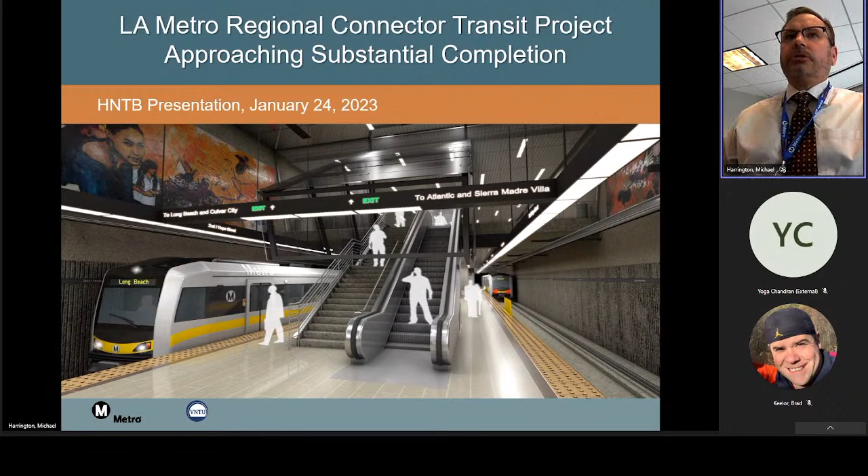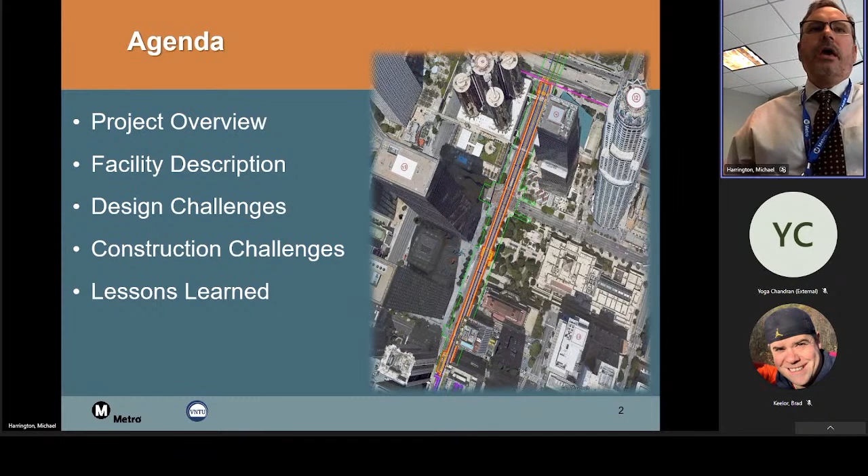The title of my presentation today is LA Metro Regional Connector Transit Project Approaching Substantial Completion. The agenda topics I'm going to cover: I'll provide a brief project overview, get into some facility details and descriptions, then talk about design and construction challenges we've experienced over the last few years, and wrap up with a brief discussion on lessons learned that might be applicable to some of your projects.

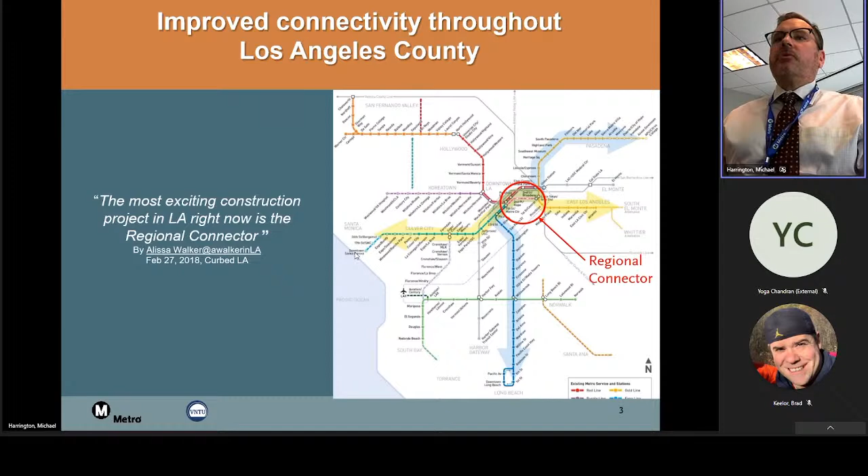Now if you flip over to the east side of downtown, we have our Gold Line, which connects Azusa, Pasadena, LA Union Station, and then turns easterly out to East LA. Right now these light rail systems are disconnected. What we're trying to do with Regional Connector is link all of those up so we can have one-seat rides from south to north through the county, as well as west to east. That's going to eliminate potentially up to 20 minutes in some of our commuters' travel times from all the transfers they need to take today.

Some other highlights or statistics about the project: it's not very long, it's 1.9 miles long. It comes up Flower Street, makes a sweeping turn easterly underneath 2nd Street, and connects into the existing Gold Line in the Little Tokyo area of downtown. We are building 3 new underground stations to better serve downtown. We anticipated, pre-COVID, 90,000 daily trips, and we're planning to run trains eventually at 2.5-minute headways through the corridor.

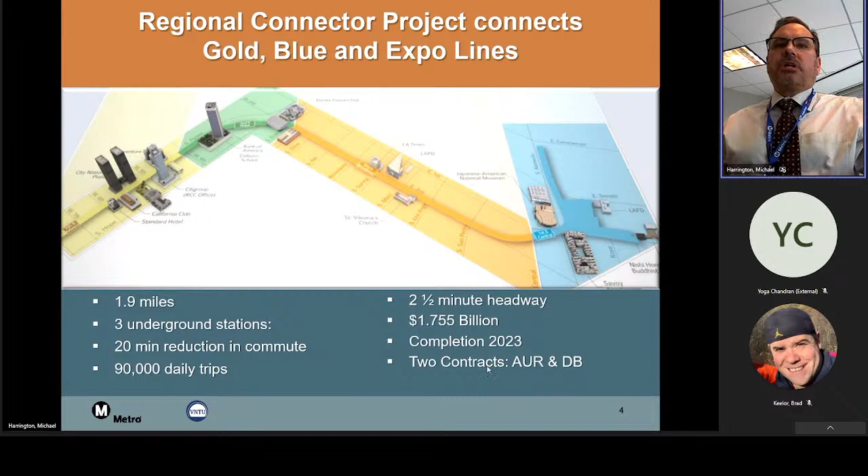Our full funding grant agreement is $1.755 billion, but if you add in the soft costs and local matches associated with this project, we're closer to $2 billion. We're anticipating a completion in 2023, hopefully in a few months here. We are delivering this project under 2 contracts: one was an advanced utility relocation contract, but most of it's being delivered through a design-build contract through a joint venture of Skanska Construction and Traylor Brothers.

Now a little bit more about the facilities we're building. This slide's a little busy, but what I wanted to show here is an exaggerated soil profile of downtown Los Angeles. If you can see here to the right, this is the Little Tokyo area where our project starts.

It goes underneath 2nd Street. We have our new historic Broadway station, I'll get into the details on that in a moment. For those familiar with downtown Los Angeles, we have an area called Bunker Hill, where our arts district is, Disney Concert Hall, and a few new museums that have opened up, a big tourist area. We're building a new station to serve this area called the Grand Avenue Arts Bunker Hill Station, and then we transition underneath Flower Street, a major artery through downtown Los Angeles.

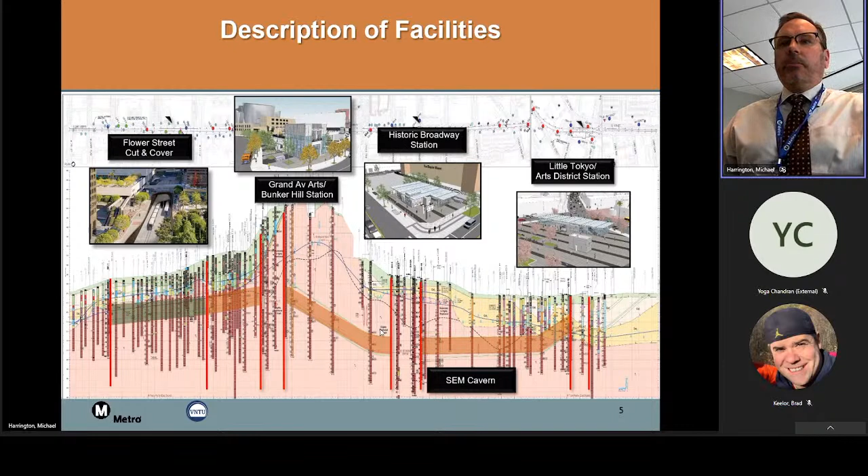And tie into our existing 7th and Metro station. Now, a little bit about the soil profile for the geotechnical engineers on the call. I wanted to zoom in here.

For this particular project, we did generate a geotechnical baseline report. This was part of the bid documents included in the design build solicitation. But if you zoom into some of the profiles, it gives you a flavor of what we were dealing with from a tunneling standpoint. The orange here represents our tunnel profile.

In our project, we primarily were tunneling through a layer called the Fernando Formation. It's predominantly a massive siltstone, or soft rock. It was actually ideal for tunneling, a very soft rock, easy to tunnel through, yet very stable. You could cut into it vertically and not have to shore it.

Above that, though, we did have alluviums. We had coarse grained sediments, sand with some gravelly sands, variable amounts of cobbles and boulders. That was atop this Fernando Formation. And as you approach the LA River Basin, that layer got a little bit deeper and more pronounced.

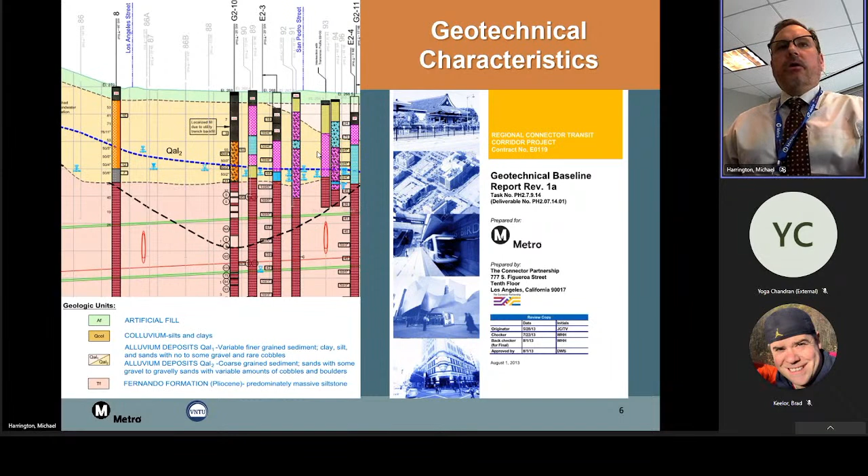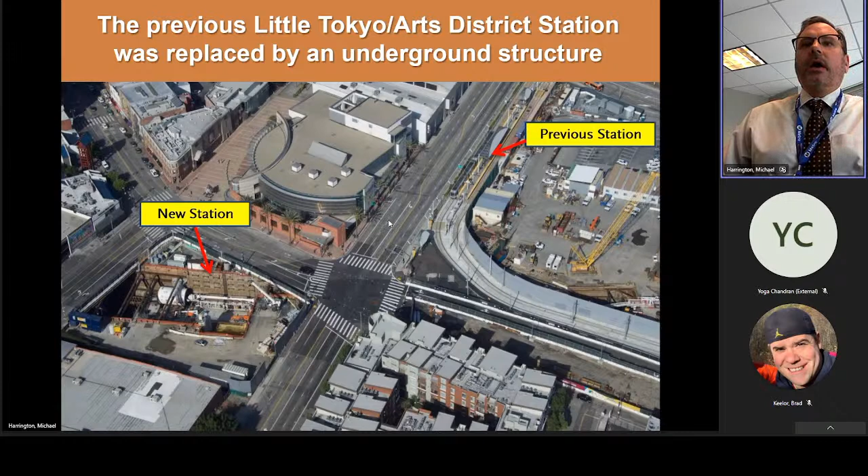In fact, when this photograph was taken in 2016, if you look closely within our supportive excavation system, we actually used this as the launching point for our tunnel boring machine. You can see the cutter head and the shield there real closely, and then our trailing gear went actually underneath the temporary deck that we had underneath Alameda Street and First Street.

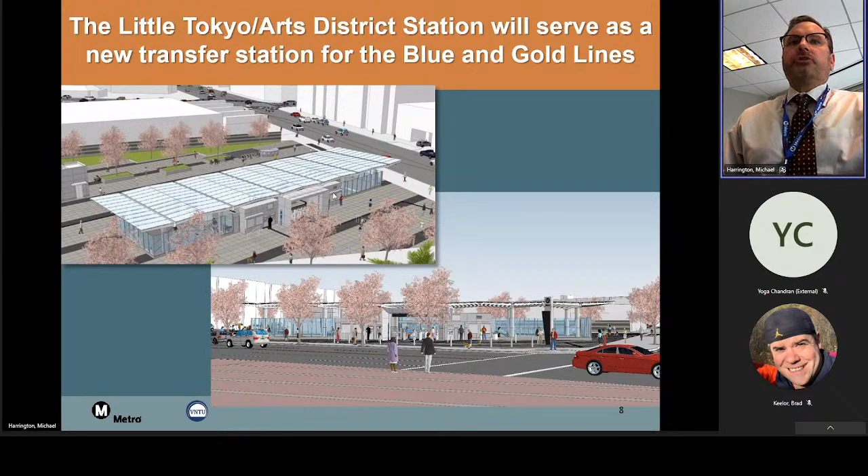This is a rendering of what the finished station will look like. It's pretty much a cookie cutter station for all of Metro's newer stations. We're trying to streamline the design, make roofs and lighting systems standard across all of our stations to reduce costs, especially maintenance costs and spare parts costs.

When we were building this particular station in Little Tokyo, these are some representative samples of our shoring systems that we used. I think we pretty much used just about every tool in the book on this project.

For example, in the upper left-hand corner, we used a soldier pile and lagging system. In this particular area, we additionally shored the system with several rows of post-tension tieback anchors. In this lower photo to the left, you can see we've used some pipe struts. Because we had to support roadway decks in some locations, we used pin piles. This is just another photo of the various types of shoring systems you can see in this area.

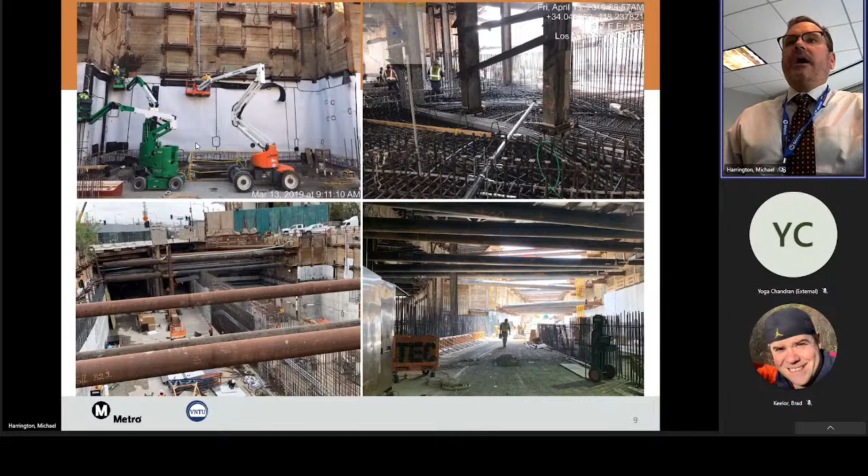I was also going to add real quickly, for our waterproofing membrane systems, we are using an HDPE high density polyethylene waterproofing membrane seam. It has welded seams, shown in the black lines here. We also have a supplemental system called the Fuko hose system, a remedial grouting system that allows us to repair leaks that show up after we've completed construction.

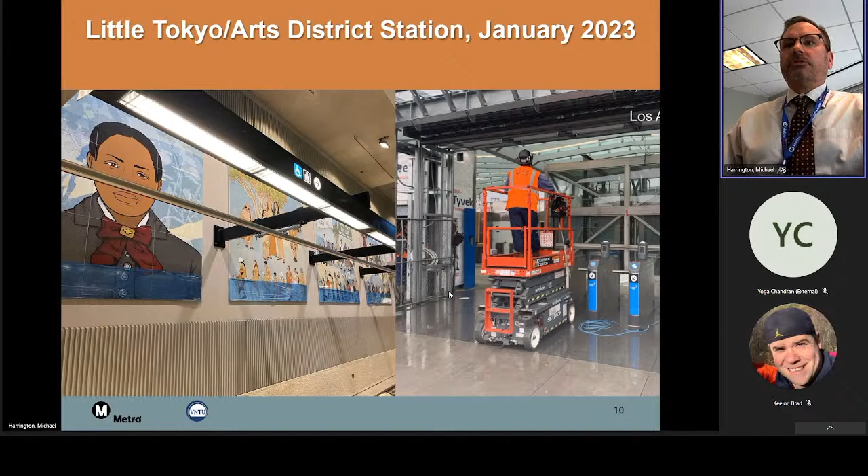And this is what that station looks like today. This is that wall, the completed wall. The shoring system is right behind this artwork in this cast in place wall. This is what it looks like up at the plaza level of our stations. This is another view of the station. Right now we're in the phase of the project where we're just wrapping up mainly some architectural finish work, and then doing some final station cleanup, getting ready for revenue service.

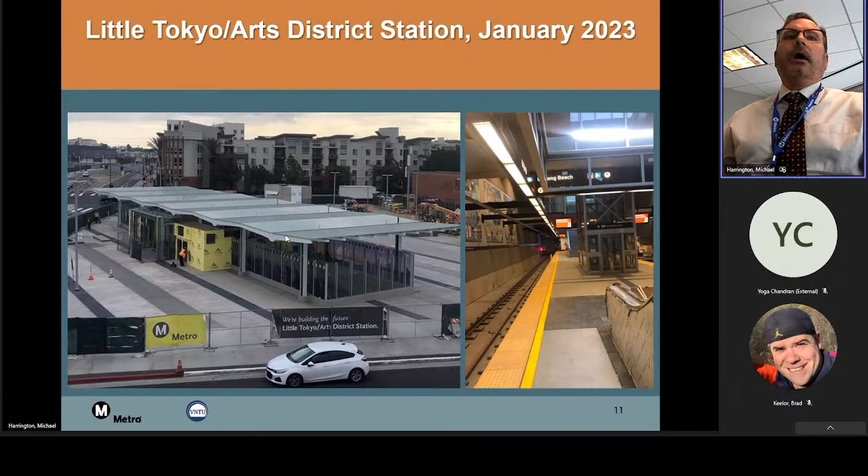In fact, our operations group is running trains right now, doing what they call pre-revenue testing, again trying to support an opening here in a few months.

Moving over to our historic Broadway station, a local landmark in this vicinity is the old LA Times headquarters complex. They actually took up a whole block of downtown Los Angeles. This is a historic mid-rise structure, and then around that were some 1960s and 70s era additions, including a large parking garage.

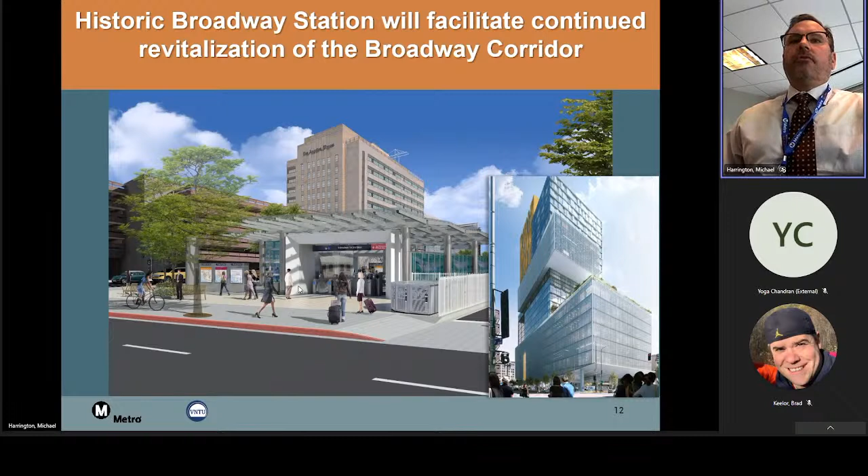So we did enter, Metro as an agency, into a public-private partnership development agreement with this particular developer. Metro got a very steep discount on our land acquisition costs or easement acquisitions for this area. In return, we did design the structure to serve as the foundation for this mid and high rise structure, and the private developer did contribute some construction funds for this particular station.

Now, some other unique things about this station, it was very constrained from an access standpoint. In the background here, this is the historic part of the LA Times building, and this is the older parking garage. But at this particular location, our station was about 70 feet deep. We had to keep 2nd Street open to traffic. There was just too much traffic and would have been too impactful to downtown to close for multiple years of construction here, so we did have to keep it open.

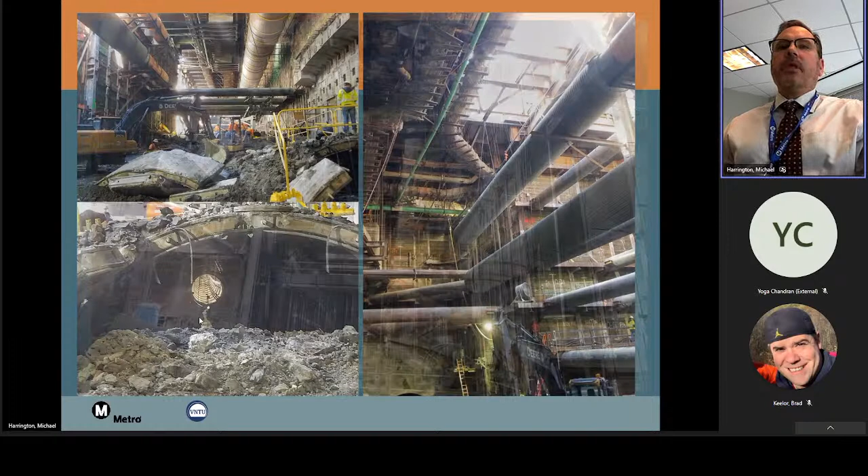The other thing I was going to add is because it took so long to hang the utilities, and the excavation took so long to get down, to additionally save overall construction time, we allowed the tunnel boring machine to actually go underneath the excavation site. And as we excavated or exposed down after the tunnel liners were put into place, we had some throwaway tunnel liners that we just demolished, and that allowed us to get down to the invert of the station. This is what it looked like when we actually reached invert.

Again, soldier piles and lagging, post-tension tieback anchors, struts, you name it, we used it.

The other thing I want to point out, and this was a little hairy for us, is if you can see my cursor here, that is actually the basement of the LA Times headquarters, that 10-story structure that you saw in the photo I showed you earlier. We actually had to underpin it. The foundation came out into the public right-of-way, and we had to design an underpinning system. That took us about a year to design and get approved by the city and the various stakeholders, but it was very successful. And what you're looking at here in this photo is the cast in place guideway structure.

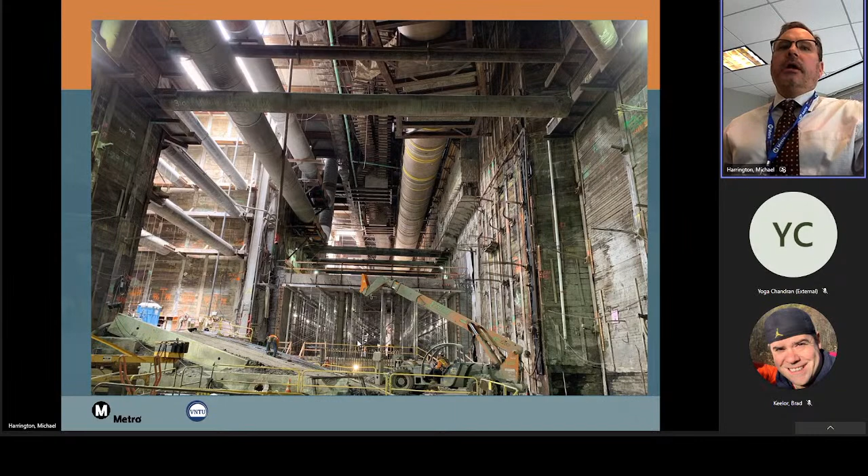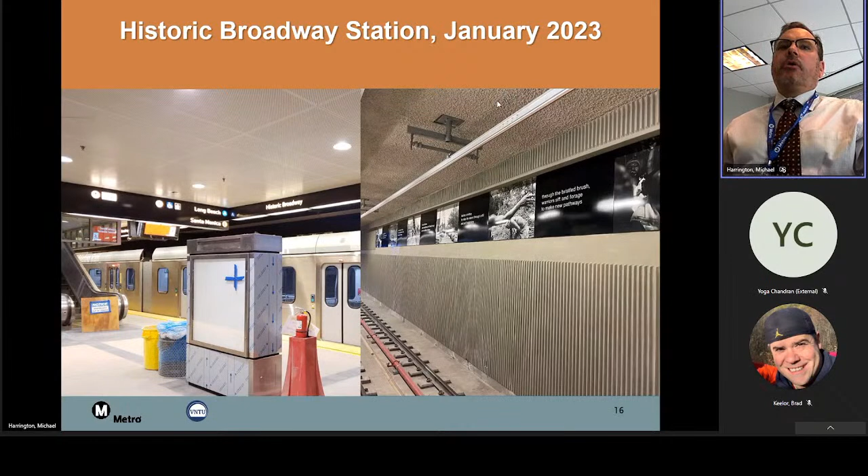This is where our tracks go, where our platforms go, and this is what that area looks like today. This is our platform area, and these are some of the finished walls that were in the previous photo. The LA Times headquarters building foundation entered into that area. These are some more photos showing what it looks like in January, really finishing out the architectural work and cleaning up at the platform levels of the station.

Now, our third new station is going to be the deepest station on the entire metro system. It's 100 feet deep. The unique thing about this station is not only does it have a pedestrian bridge that's 2 stories above finished grade, but passengers will actually get down into our station via 6 high-capacity, high-speed elevators. Because of the depth of the station, it was determined to be impractical to use a series of stairways and escalators to get down there, so we were using elevators.

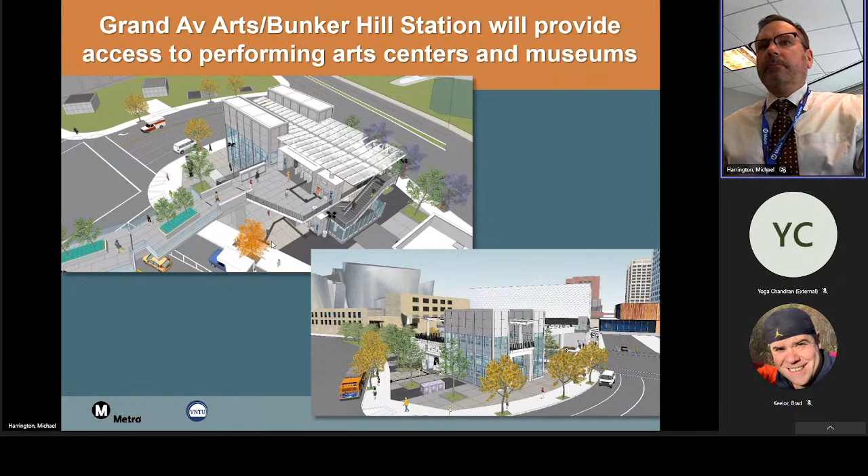We modeled this station after one that was built by Sound Transit up in Seattle, as well as one that's existed for years out in Washington, D.C. on the D.C. Metro system.

This is what it looked like when we were excavating for that station, because it was so deep. To put it in perspective, that little orange dot is a construction worker. We had 5 rows of struts, 5 layers of struts, needed for this particular station.

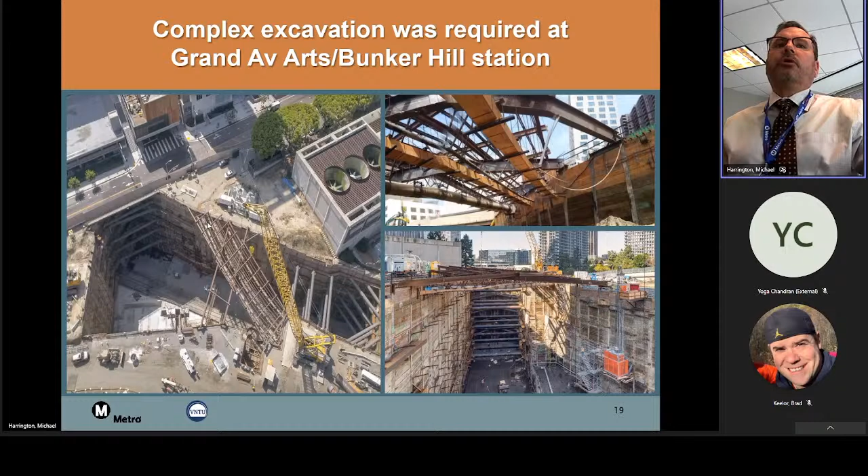We also had many dozens of post-tension tieback anchors, and we had to construct a utility bridge. Our new station actually crossed underneath Second Place in downtown Los Angeles. We were able to close this stretch of roadway, but we had to maintain the utility, so we had to build a utility bridge through there.

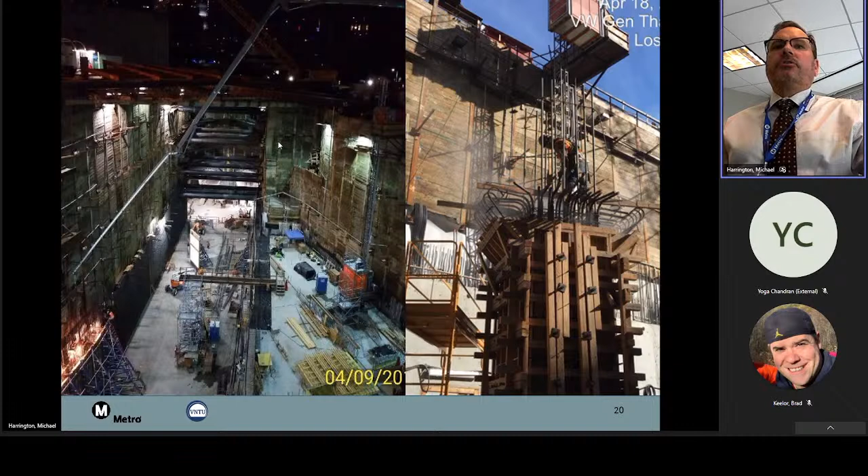These next photos show how the station was constructed as we were coming back up. As we built the invert, continued building various floors, and the concrete cured, we were able to remove the pipe struts and cut off the tieback anchors as we moved up, eventually backfilling the site. These are more progress photos showing the permanent structure being built back up to grade.

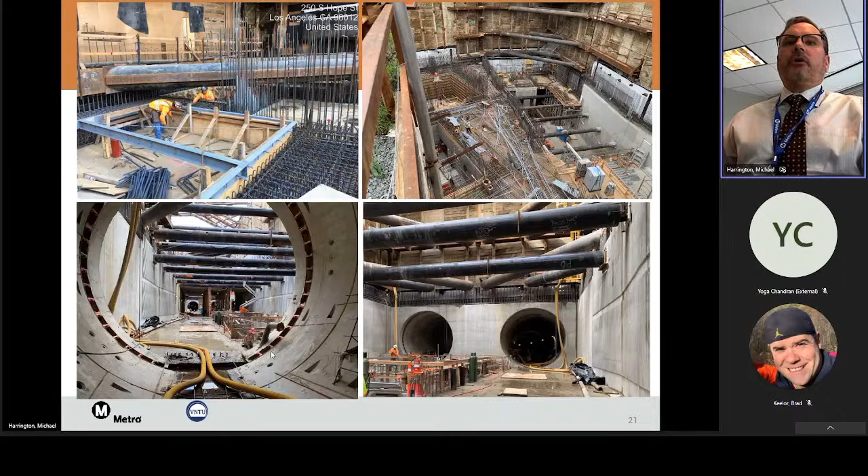In the lower left photo, we also had to construct a seismic joint. We are in Los Angeles, in a seismic zone, so we had to build a seismic joint that allowed for differential settlement and movement between the station and the bored tunnel segments. I'll get into the bored tunnels in a second.

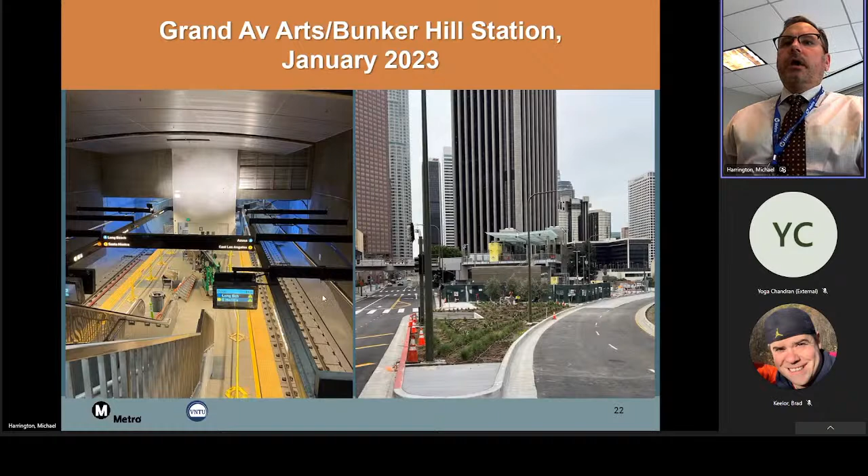But anyway, this is what the station looks like today. This is the interior, the platforms, and up at the street level, the landscaping is now in, along with some other features of this station.

Again, like the other stations, we're primarily focused right now on architectural finishes and an elevator lobby, because this will be our primary means of access for customers and transit users. We did try to make this an enjoyable space. We have glass curtain walls to support our glass elevators, reducing that so people didn't have a claustrophobic feel entering the station.

We also have this six-story piece of artwork, a $1 million piece of artwork. It's all small mosaic tiles that go up along the wall of our open elevator entrance shaft.

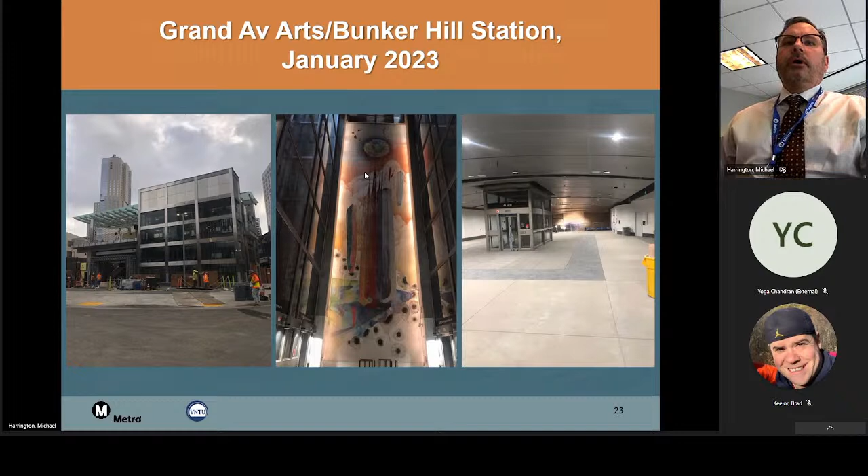Now moving into Flower Street, some challenges we had there: this is right through the heart of the financial district of downtown Los Angeles, with a lot of high-rise buildings. When these high-rises were built, the shoring systems, the tieback anchors, were left in the public right-of-way.

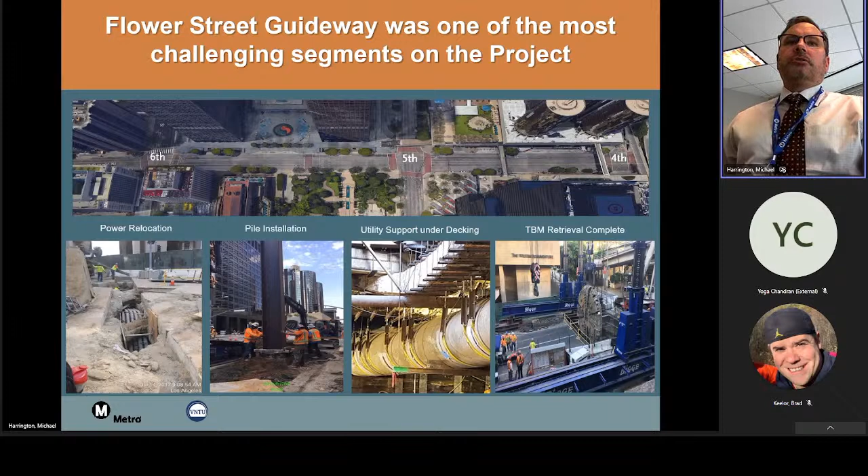We did not want to bring the tunnel boring machine through this area. We felt it was too risky, because if we hit those tiebacks we didn't want to risk damaging the machine and having to do an emergency excavation. I think most people on the call are probably familiar with Big Bertha up in Seattle. We did not want to repeat that down here. So we made a strategic decision at Metro to use cut and cover construction rather than bringing the tunnel boring machines through this area.

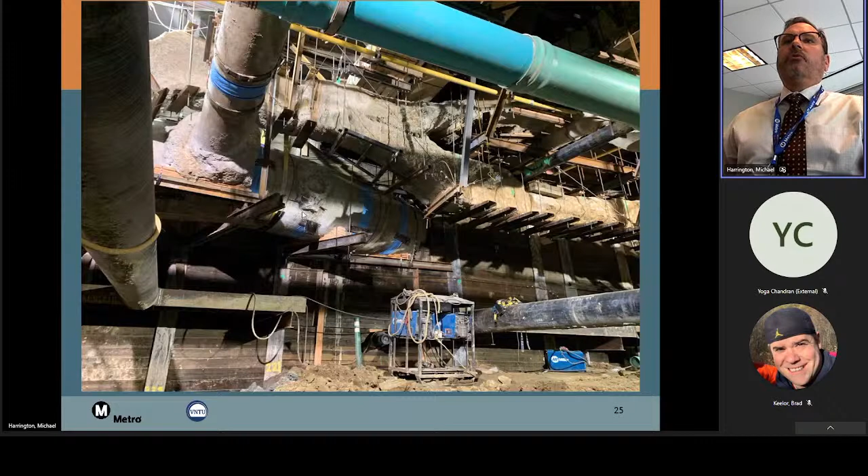These are just some examples of the shoring system that was used, with a lot of hanging utilities. This is when the invert was being placed and our waterproofing membranes were being installed.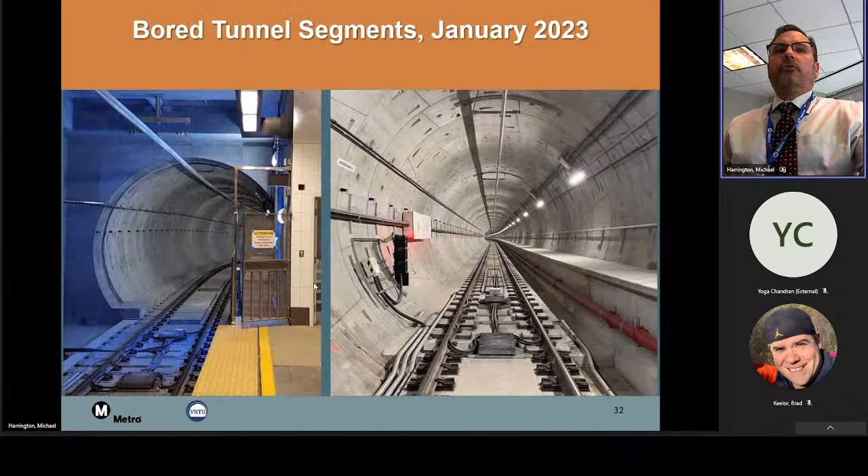Some supplemental measures that we installed—we were very, very concerned about settlement during not only the station excavation but the tunnel boring work. In the Japanese Village area especially, we were tunneling at a relatively shallow profile. So we used compensation grouting pipes, drilling an array horizontally underneath all of Japanese Village Plaza. In case we did have settlement, we could use those to remediate or push up the ground. Metro spent a lot of money on it and never had to use it, but again, it was better safe than sorry.

The other thing we did was monitor very closely ground movement in this area. For example, we used an SAA, or shape accelerometer array. In fact, it was so precise you can actually see some of the technology that's been developed over the last few decades—it's just quite amazing. This is a representative sample showing how this is real time.

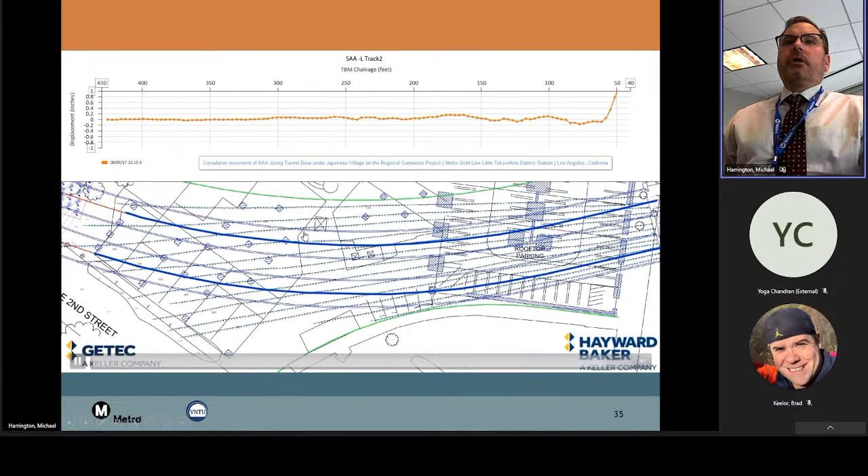It's sped up, but this is real-time measurement of when the tunnel boring machine was going underneath Japanese Village. You can actually see the pressure wave in front of the machine measuring point. In this displacement, we had about 0.2 inches of uplift, but it came right back down when the tunnel boring machine passed. Anyway, it was really good news for Metro—we got through that area without any damage, without any noticeable settlement at all at the end of the day.

Finally, I want to touch on what I would consider the most challenging part of our project. We had to build an SEM cavern, or sequential excavation method cavern, to support a track crossover needed for our operations. For those who don't know, this is a technology developed by the Europeans a couple decades ago. The reason we needed it is where we needed to put this crossover, connecting the two bored tunnels, was directly underneath the corner of the LA Police Department's new headquarters building.

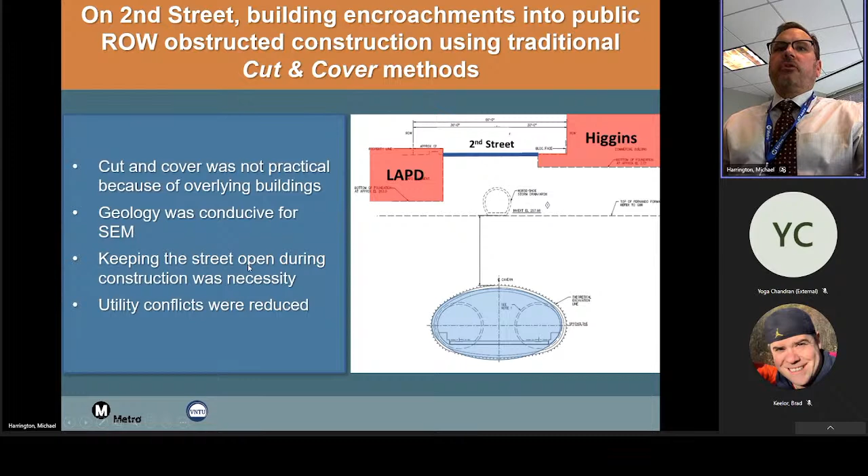It was also underneath the corner of a historic building, so we couldn't do an open cut in this area. So what we did is use the sequential excavation method. It was 290 feet long, 58 feet wide, 36 feet high. What it is, is a series of 5-foot excavations longitudinally into the ground.

Then you temporarily support your excavation with basically a shotcrete temporary liner—a partially reinforced shotcrete liner. So as you excavate 5 feet, you install your lattice girders and put a shotcrete liner in. After that is stabilized, then you go another 5 feet.

As you can imagine, extensive engineering was put into this—it was about as complex as it gets. We used 3D analysis to simulate the construction sequences, and we did a 2D soil structural interaction, dynamic analyses.

We had independent design checks, and we also had a tunnel advisory panel of very experienced PhDs, each one with an average of about 50 years of experience, that reviewed every aspect of our design.

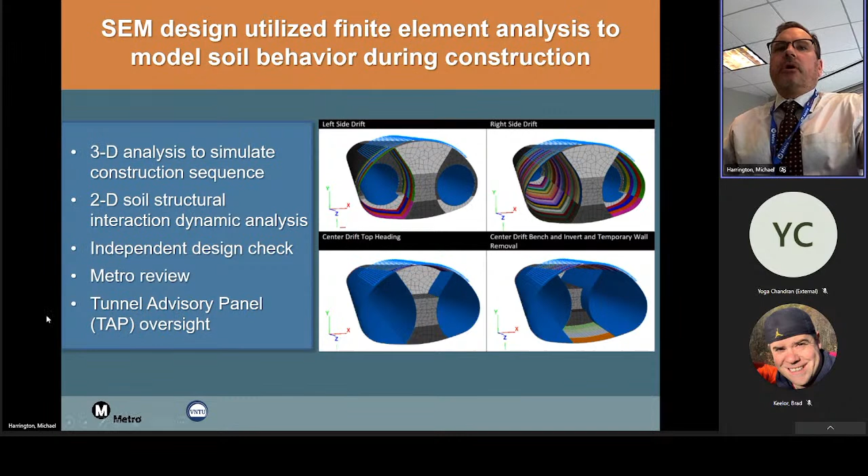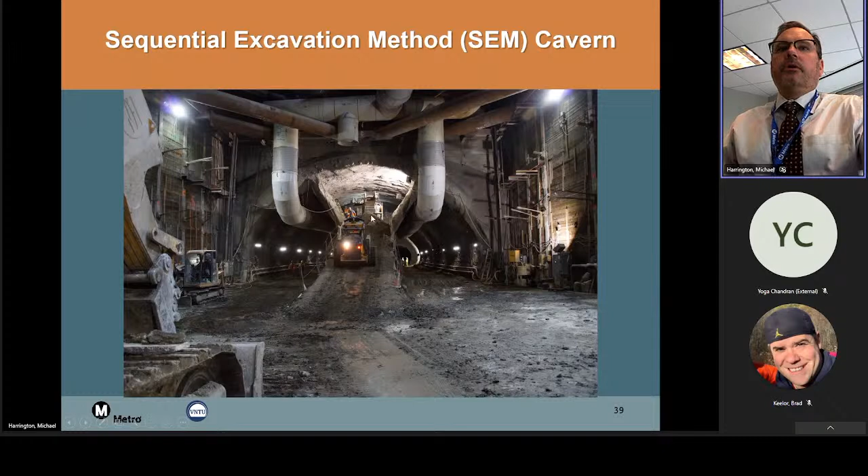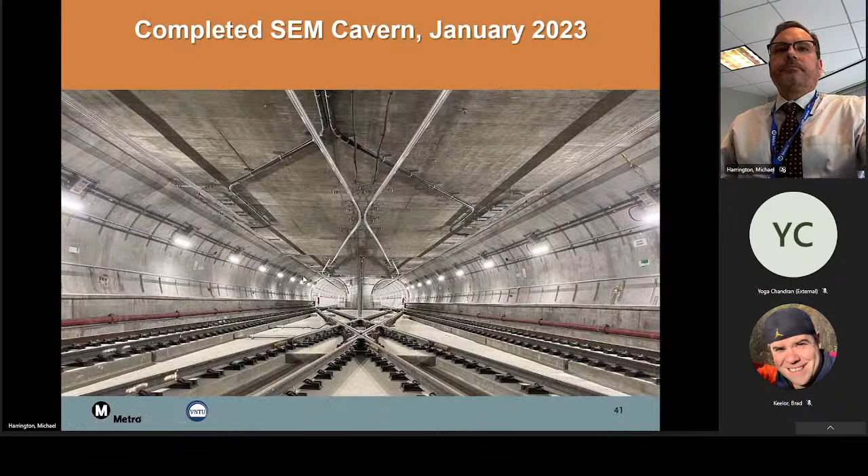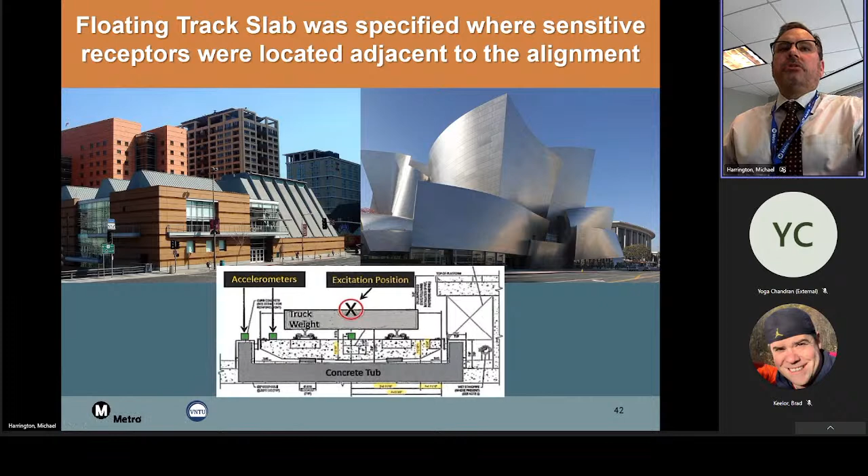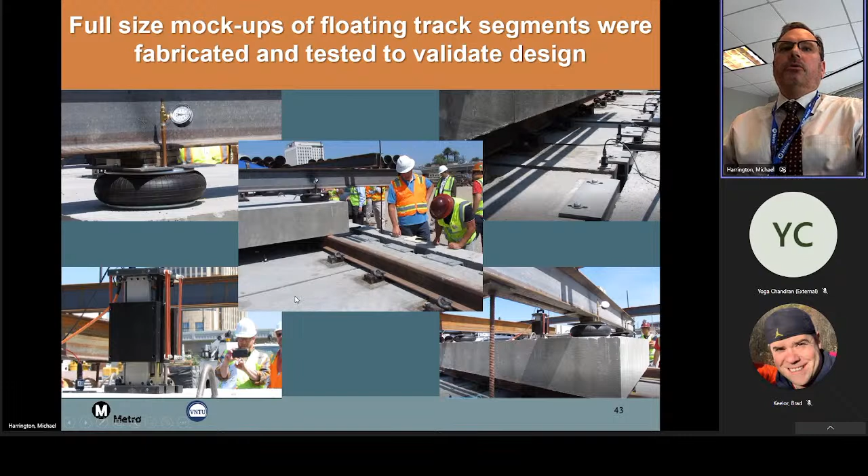Just some loose ends here. Because we were tunneling underneath the Disney Concert Hall and Colburn Music Center, we had to use floating track slab segments in this area. This is basically precast supports for the track work that sit on rubber pucks, and what that does is dampen the vibration so it doesn't propagate up into the foundation and into these music venues. This was part of our environmental document, and this is what the finished product looks like.

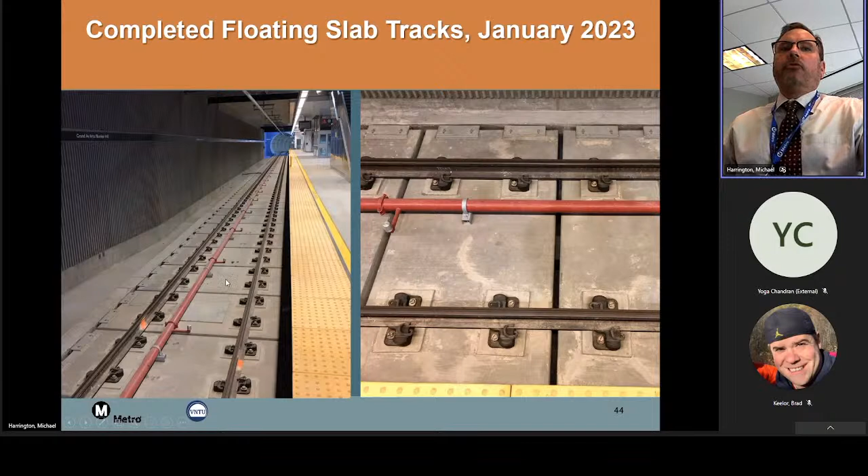We had extensive laboratory testing and mock-up testing before all of this work was installed, and we're actually in the process right now of doing some final in-situ testing, and so far it seems to be working out very well.

Some key lessons learned. I could talk a lot about the various lessons learned, but for this group, I want to reiterate that we had a very robust monitoring and mitigation settlement system in place. I think that's essential when you're doing these very challenging underground projects - utilize every tool that you can.

Money well spent. I will say though, our water intrusion methods are something that as an agency we do need to revisit. The HDPE is great if your structures are square or rectangular, but where you have angles or rounded joints, it's very difficult to work with. You can see all of the welds and small pieces we had to construct, and ultimately in some of these areas we did experience leaks. Fortunately we have grout hoses, and we're able to remediate - it's ongoing right now - some of this leakage by doing high pressure grout. But nonetheless, HDPE was very difficult to work with in some of these difficult geometry areas.

Finally, I can't emphasize how important it is to take advantage of the newer technologies that are out there - 3D modeling, BIM modeling, clash detection systems - very critical on these mega projects, especially when working in these dense urban environments.

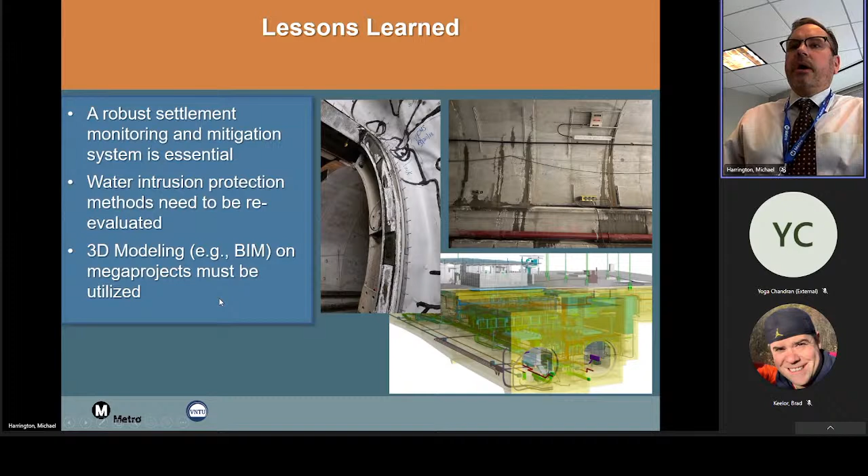So with that, I'm going to stop my presentation and turn it back over to Yoga and Brad, who I think are going to facilitate the question and answer session of our presentation today.

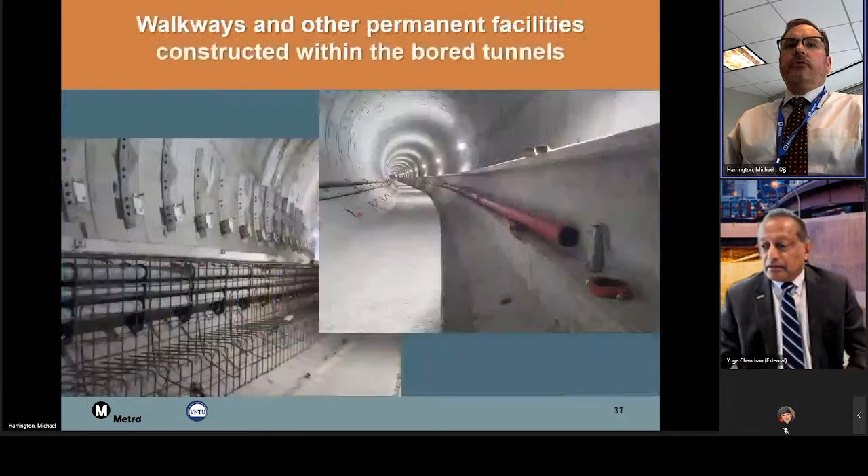Yeah, great question. I'm going to go back to a slide to tell the story here a little bit. Okay, so the good news is that throughout our project, we had very little settlement.

So we had some good news there. The only other location we were very concerned about was underpinning the corner of the LA Times mid-rise building, a 10-story building. Very concerned about that. The ironic thing is we basically had no observed settlement at all of the foundation. We were able to stabilize it.

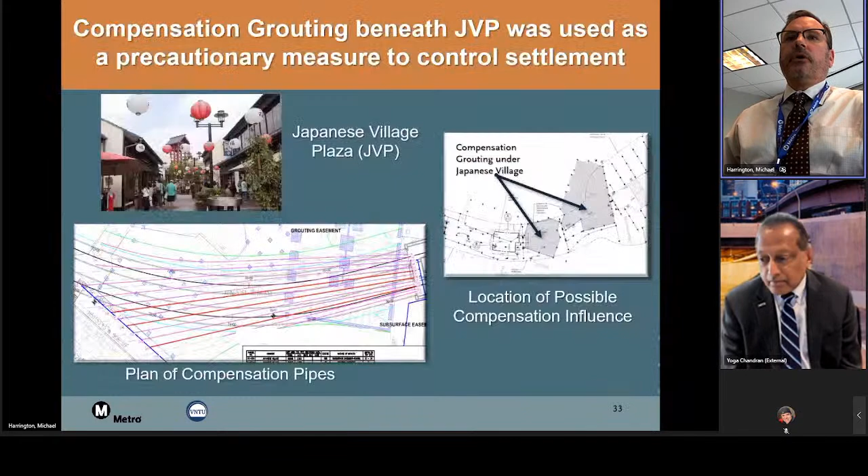We did encounter groundwater - we thought our worst area was going to be at the Grand Avenue Arts Bunker Hill station, but in reality it was really at the 2nd and Broadway station. We had to construct pumps, basically dry wells, temporarily to draw down the groundwater in this area. It was a challenge because we were using a soldier pile and lagging system. We didn't have a whole lot of hydrostatic pressure buildup on these walls as we were drawing down the water table temporarily, because the water was able to penetrate the seams in the lagging. But nonetheless, it was challenging for us to keep this area dry until we got the HDPE liner installed and the station work constructed.

Thank you. The next question is from Krishna Chowdhury. His question is, wants to know what software was used for numerical simulation of tunnel construction. Do you know the software?

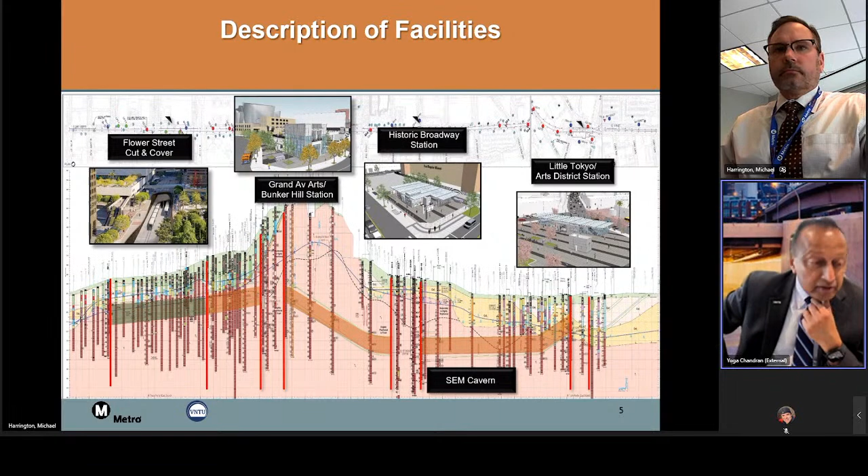Okay, thank you very much. There's another question that was posted as well. You talked about a number of construction activities in busy streets and intersections. Was there any difficulty, or did you have to take any special measures to minimize impact to the public during construction?

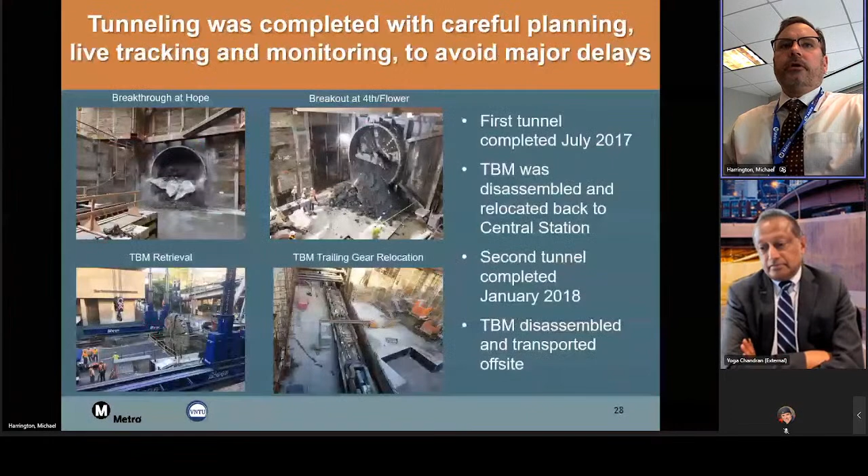Yes, we did. I'll wrap up by pulling up a photo here. The short answer is yes, and probably where we encountered that the most was Flower Street. This is a major downtown thoroughfare, north is to the right here. Because of the amount of traffic on this roadway, especially during the work week, we could not do full closures of the roadway during the week. And keep in mind, we had to do an open cut and cover in this area.

So it's almost crazy to think that we pulled this off, but we had to build a temporary bridge deck all the way from 4th Street down past 6th Street and down to Wilshire Boulevard and beyond. The way we did that is we would use the weekends. We were allowed to close the roadways on weekends, and every weekend for over a year, we would put in our CIDH piles, and put in our pile caps, and then on those pile caps, we had precast panels that we would use to build our bridge deck.

So every weekend we would excavate a piece of roadway, put in the temporary bridge deck, restripe that portion of the roadway and reopen it first thing Monday morning. We methodically went down through Flower Street each weekend until we had a full bridge deck over this area. I don't think the general public had any idea what amount of construction was going on beneath their feet as they were driving and walking in this area.

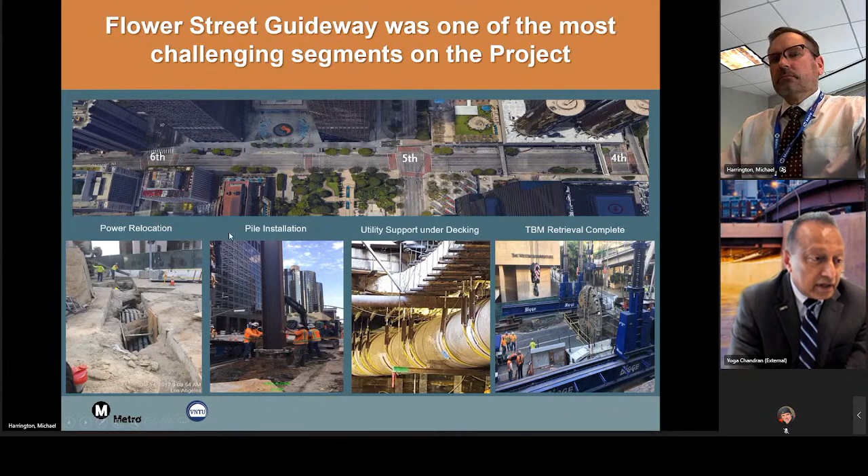One other question I have, I think I was listening to your presentation about the boring machine. I think you said you used the Herrenknecht boring machine, and you applied some of the lessons learned from the Big Bertha tunnel up in Seattle. And I know that got stuck, hitting a steel pipe. And you survived hitting an H pile over here. Is that any special design you have to do to upgrade your machine, expecting the unexpected during boring?

The short answer is this machine was not designed to go through steel piles. Not designed to do that. That was completely an unknown event. It could have been very bad for us.

The Big Bertha, I think they hit a relatively small diameter pipe that was left in during, I think, some groundwater monitoring, or there was a relatively small pipe that damaged that machine. Or at least that's the word. So no, I don't think Herrenknecht designs its machines to go through these types of obstacles. There's supposed to be enough due diligence done, good enough investigation done to avoid hitting these obstacles. I think we were just very fortunate, and I think it shows that the Herrenknecht unit was over-designed, which wasn't a bad thing.

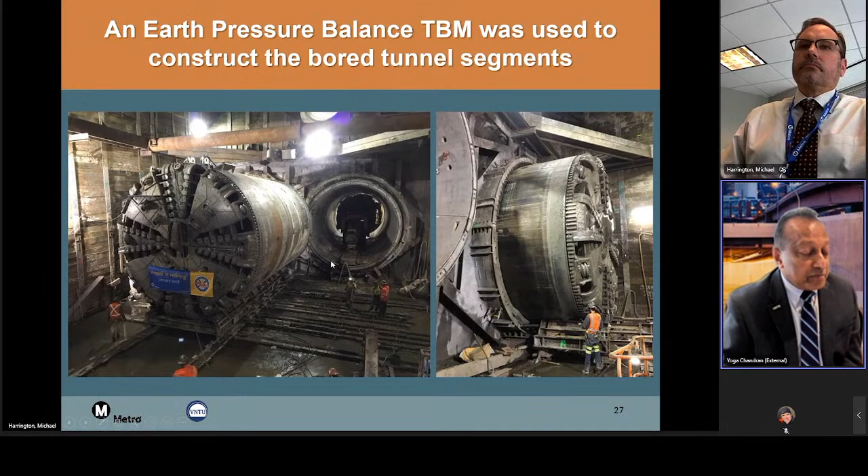No, I would agree. I think you said during the presentation you were looking at possible emergency maneuvers if the machine got stuck, and you didn't have to do that. And looking at the photo here, threading through those existing tunnels and the sewer line or storm drain, that's an amazing feat by itself.

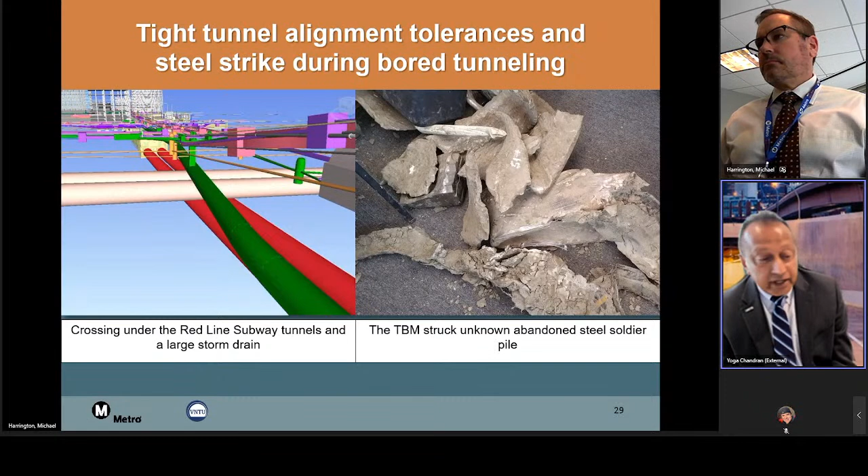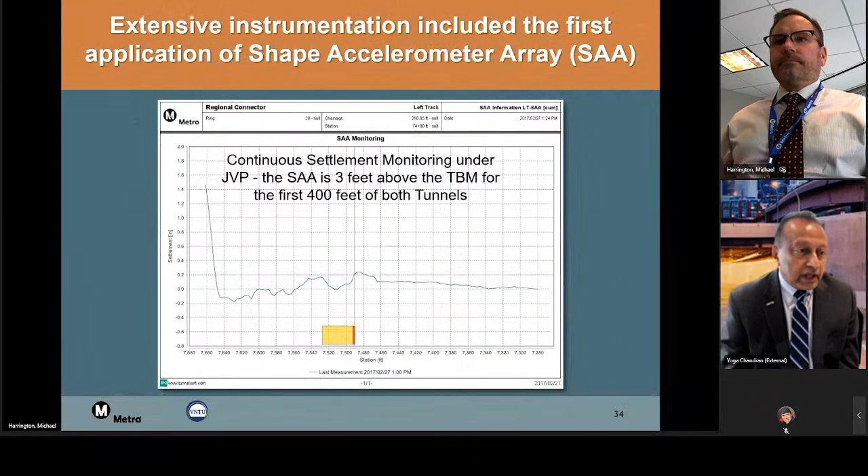I do have another question on the SEM construction and stability. Was that within the Fernando Formation? And is there any difficulty during that construction? And how deep was the tunnel in that particular area?

Great questions. So first of all, it was all in the Fernando Formation, and were it not for that, I don't know if Metro would have been able to accept the risk of this type of construction if it were a less stable soil system in this area. So we were very fortunate that we had the Fernando Formation we were working within.

We planned for the worst case, but this was actually one of the smoothest aspects of our project, surprisingly. Other than the predicted settlement directly at the roadway above near the crown, we had really no surprises here. So good news all around, and maybe this is something Metro will look at again, using this approach where the soil parameters allow us to do so.

Very good. I don't see any questions, Brad. I want to know how much time do we have, or is that it? Yeah, I think we got to absolutely everything.